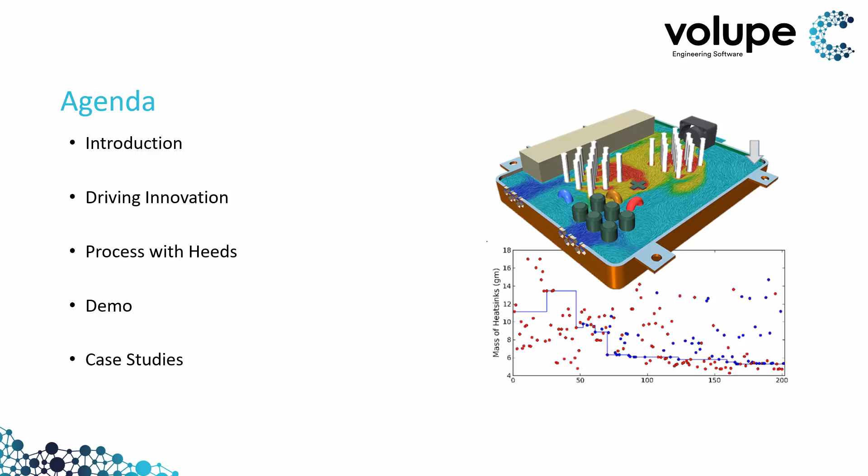Now to start off, the reason we're talking about design space exploration is because we want to drive innovation. 83% of Fortune 500 CEOs list driving greater innovation as one of their top 3 priorities. But although everyone wants greater innovation, many are unsure on how to achieve it. Now today we will specifically be looking at how you can get more value out of your modeling and simulation environment, while at the same time drive your innovation.

The example on this slide perfectly describes the complexity of many of our products today and the challenges that engineers are therefore faced with. This example of a cooling simulation from an electronic box shows a multitude of variables which an engineer can play with in order to achieve the most optimal design. There's the type and location of the fan, the size and location of the air holes, the material, location and dimensions of the heatsink, etc., etc.

Now, of course, an engineer can run a simulation, interpret the results and based on that change 1 or 2 variables in hopes of achieving a better performing model. However, due to the amount of variables and how they each affect each other, it is almost impossible to explore all the design options and find the best possible solution.

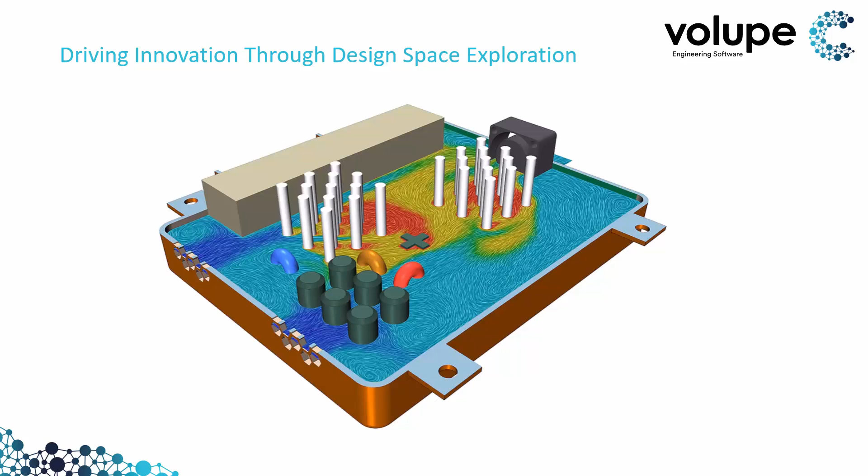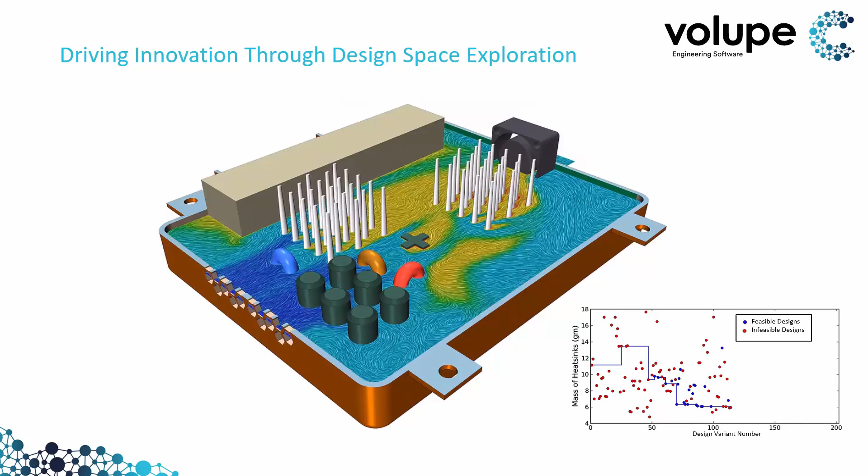This is where design space exploration comes in, and where the software automatically alters the variables, runs the simulation, interprets the results, checking whether it's a feasible or infeasible design, and continuously improves the design further until the best feasible design is found given the set objectives, which in this case is a minimum temperature and mass.

Now this is a process which can run in the background, overnight or over the weekend, while the engineers focus on other tasks, resulting in this specific example in both a reduction in mass as well as a significant cooling improvement. Of course, this is a specific CFD example, but the same can be done for the type of simulations that you are currently running, whether that is structural or acoustic or even logistical.

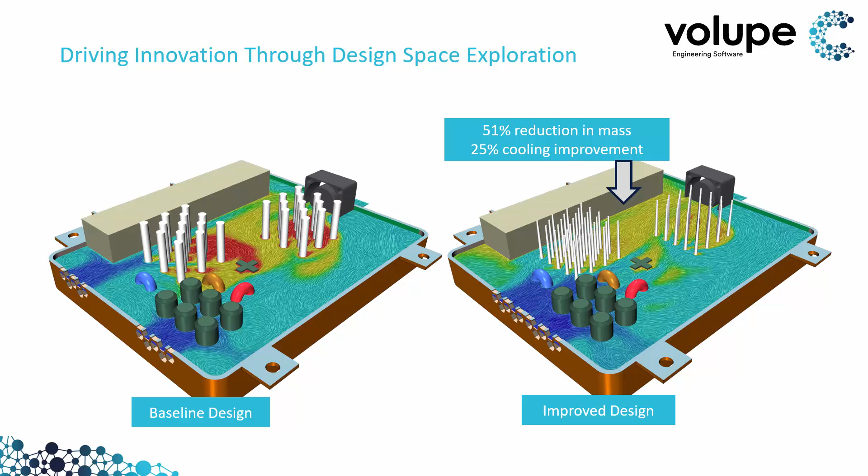The goal of utilizing design space exploration is to move beyond the standard use of simulation for validation or troubleshooting. Of course, with simulation-driven design, as we presented in a previous webinar, we are already moving into the proactive domain, as we are already trying to use simulation as early as possible in order to have a maximum impact on the costs, quality and time to market.

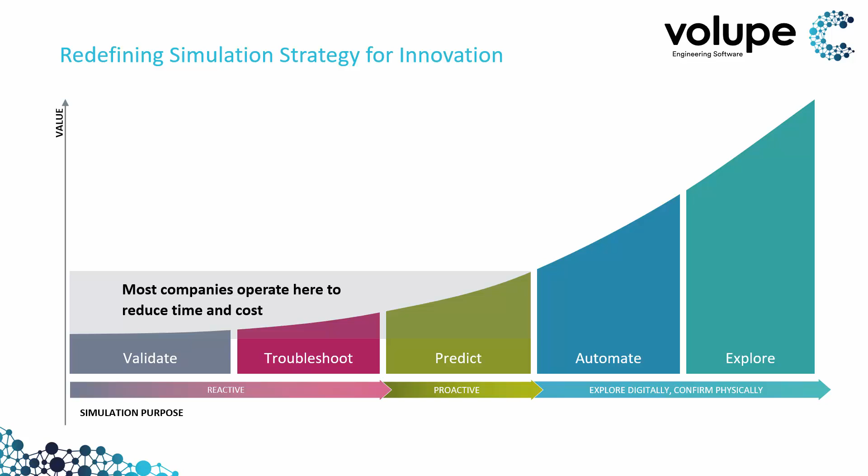And this is also where most companies nowadays are operating. But the real value lies in automating the simulation process so that the engineer has more time free for other activities, and then to explore broader design spaces to discover much better designs in a much shorter amount of time.

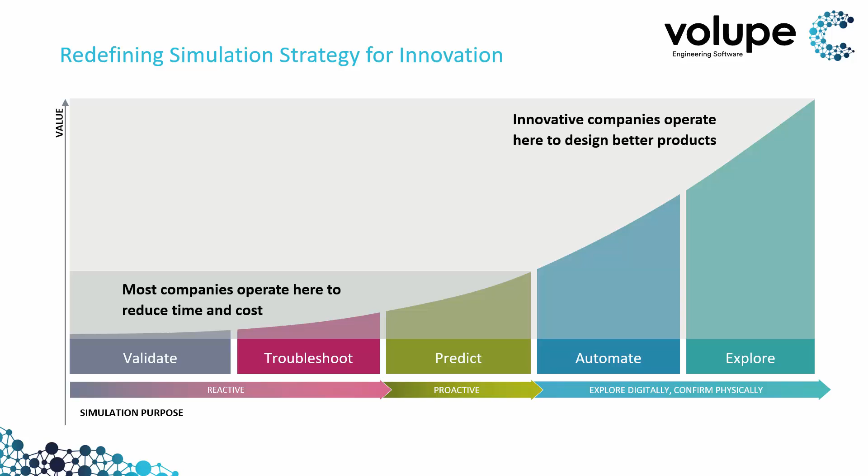Thank you, Vasco. So let's discover better designs faster with HEEDS. Here on this slide I have a typical setup for prototype development. You have design variables that you can change. You do some testing and simulations and virtual testing, and you get a response out of it, which is something that you care about.

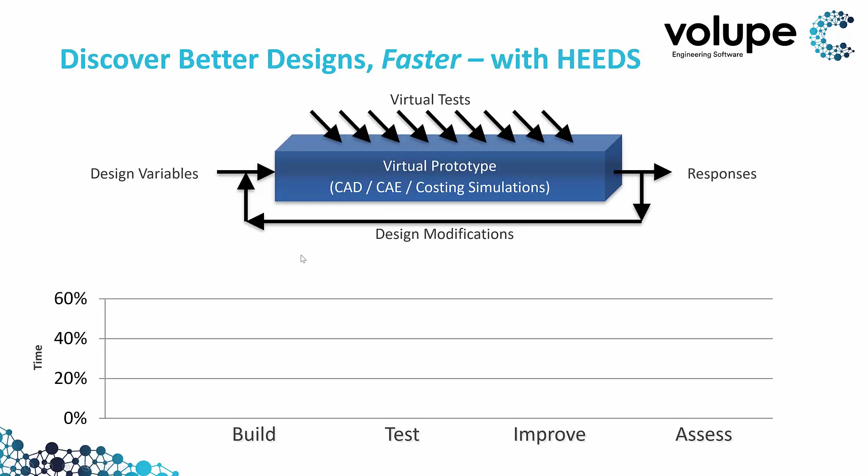Ideally now you would actually be satisfied right away, but this is not often the case, so you have to do some modifications, go back to your design variables, do the testing again, and look if your modifications now meet all the requirements. So when we ask people how they actually spend their time on this process, they say often that they use a lot of resources to build the model, test it, and then when it comes to improvements like design modifications and the assessment, often the project runs out of time.

But we can all agree on that the actual value that you can extract lies exactly in the improvement of the design and not in building the setup. So this is what HEEDS actually wants to do. It wants to align the values better with the time spent and the resources required. And therefore HEEDS comes with three main pillars.

The first is process automation that allows HEEDS to run most of the CAE tools right out of the box. You can just drag and drop them into the interface and execute those models and connect them together.

The second one is distributed execution. You can use your computer resources in the best possible way and use cloud-based or on-site or off-site resources. And then the core is HEEDS's efficient search algorithm, the best on the market actually, that allows you to be confident in finding improvements with any given number of variables for your system.

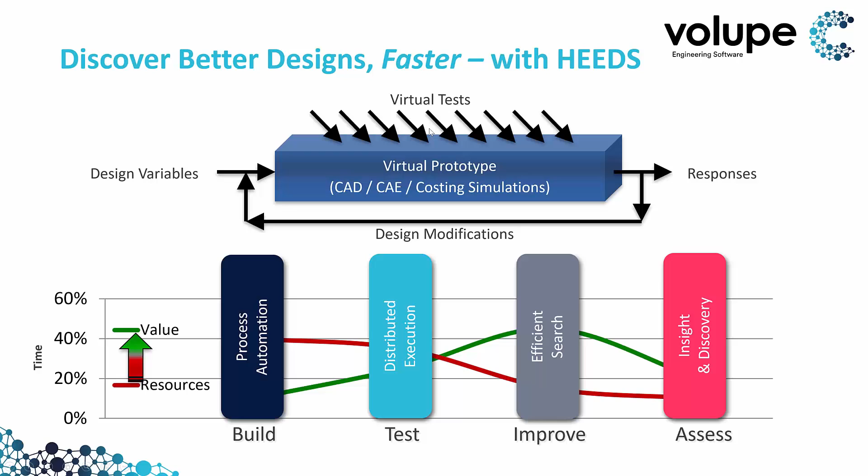And the last one is that you actually can make discoveries and extract meaningful data and make intelligent decisions based on that. So in today's webinar, I would like to show you a study based on these 4 key enablers for underhood pipe flow design.

So this is the engine, and here we have a pipe connection between these two hoses here. Inlet is on this side, the flow goes in and it goes out here into the rest of the engine. The pipe has some parameters.

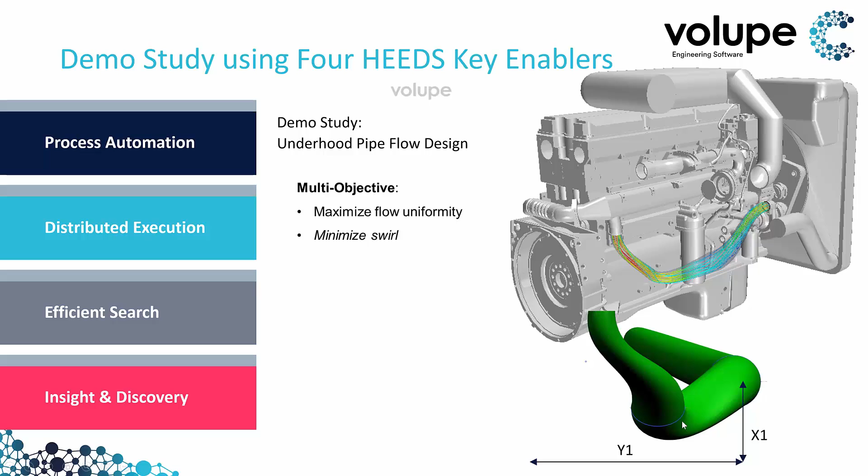It's built up from inlet, outlet, and in between we have 2 cross sections, circular cross sections, where you can vary the diameter and then the position of the 2 cross sections. So you can change it like this and up and down as well. And if we look from the side, for the second circular cross section, it lies about here. We can also tilt the cross section with an angle.

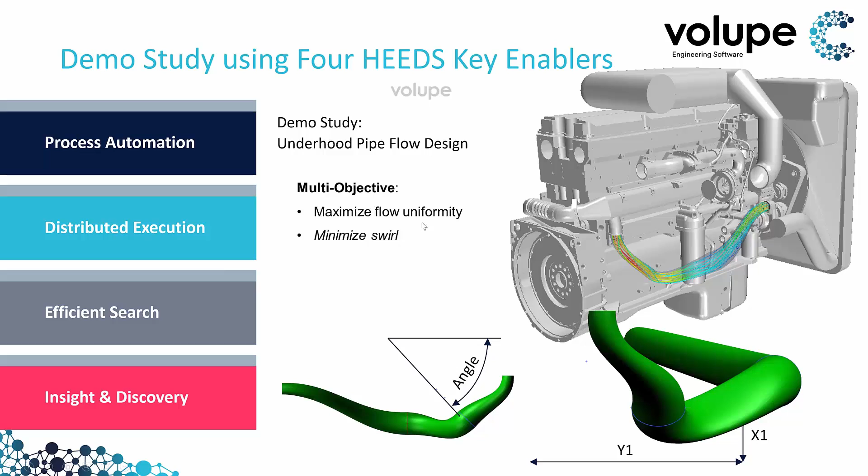So the idea is to actually maximize the flow uniformity here at the outlet, while at the same time minimizing the swirl. To do that, we use 2 tools to simulate and understand how the virtual prototype actually performs. One is NX for the CAD geometry generation, and one is STAR-CCM+ for the simulation.

So in NX, we prepare the design with parameters to describe it, and then HEEDS comes in and overrides these parameter values with design variables which were created or controlled by the algorithm.

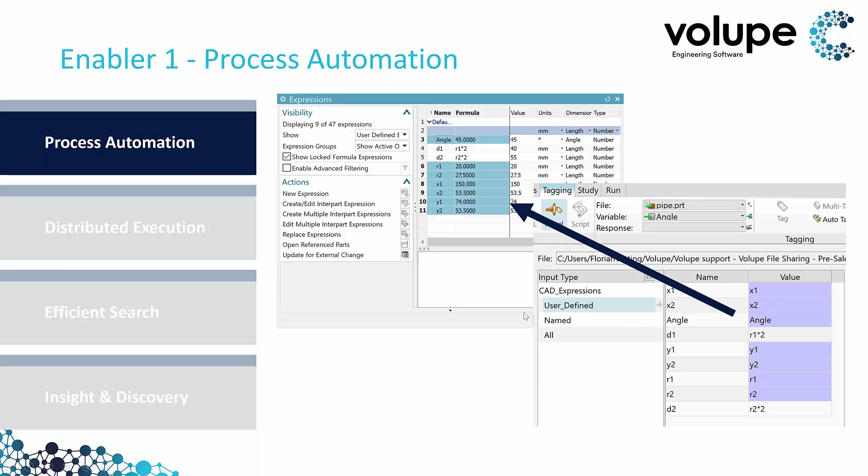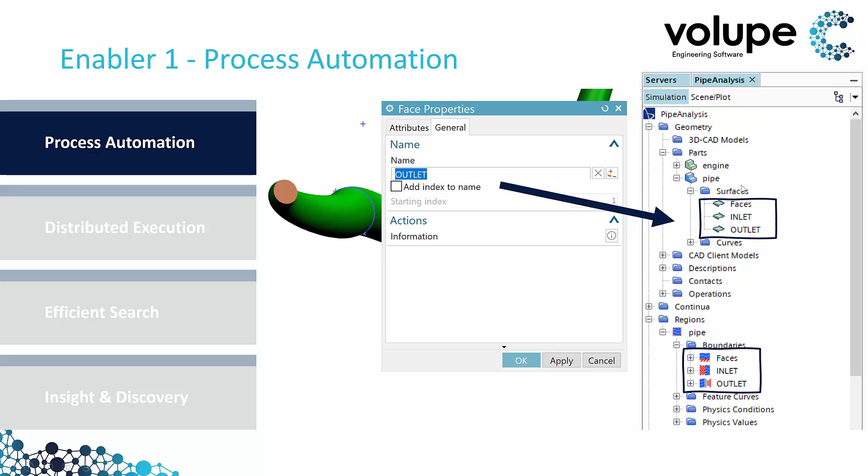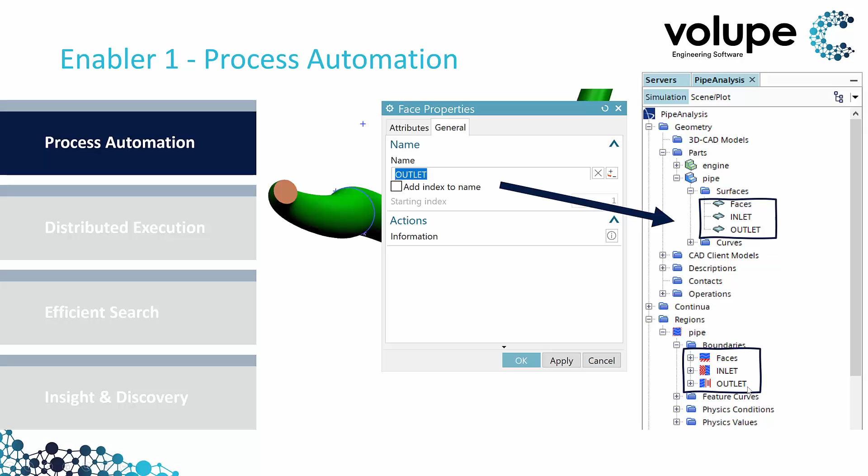On the other hand, on the other side of NX, we actually take the new generated geometry and put this new geometry into our star analysis simulation and exchange our pipe part inside star with the new surfaces, and then they get updated and meshed, and we have new boundaries. So HEEDS controls this in an automated way and iterates to improve the design.

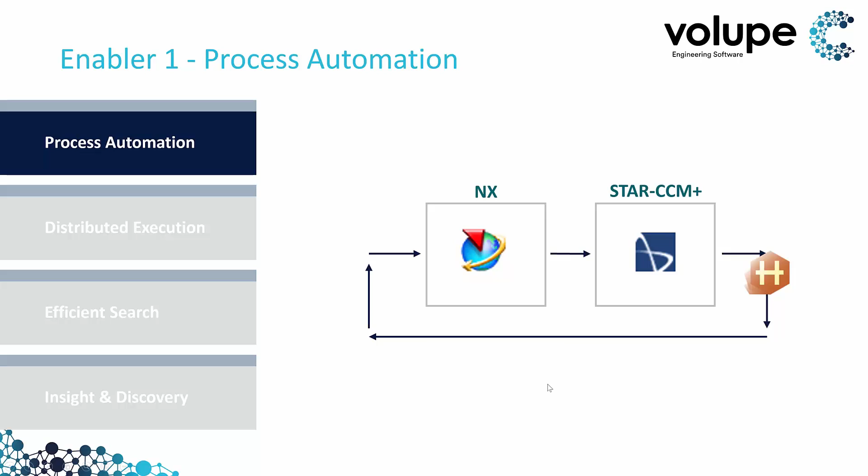Here we can see how we can build it up. We just drag and drop the portals into the place, and we can also use the default portal and just assign it to a certain program. Like in this case, we might want to have a third program, maybe SimCenter 3D for strength calculations, and then we can move them around in the design.

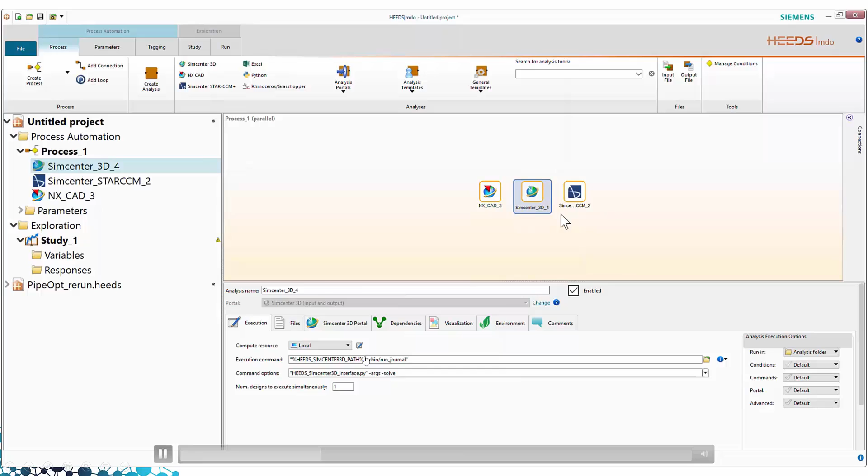The processes can be moved around in your work on your desktop here, and decide if you want to run it in parallel or if they are dependent on each other. So you can drag and drop any other portal here as well.

So for this case, we just have NX and star, and then we need to define the parts. So we need to have a basic setup with the part here as an input to our analysis and an output. We use a parasolid here, and the same for star. We have as input our baseline design, and then we need as input as well our new pipe part that comes from NX, and then we have output as well, and here we tell HEEDS actually to exchange the pipe part in star with the output that comes from NX.

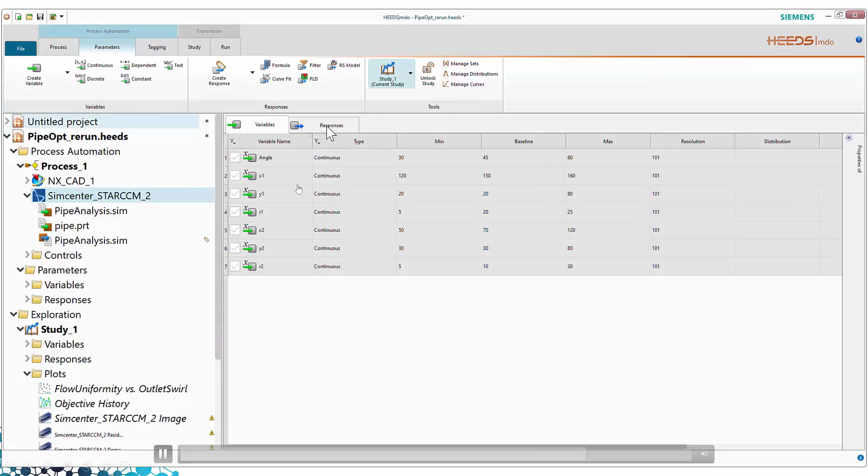Then we create design variables, we create responses, then we go to tagging and actually connect our input files and output files with the design variables and responses that we want to have, like in this case the flow uniformity from a report in Simcenter STAR-CCM+.

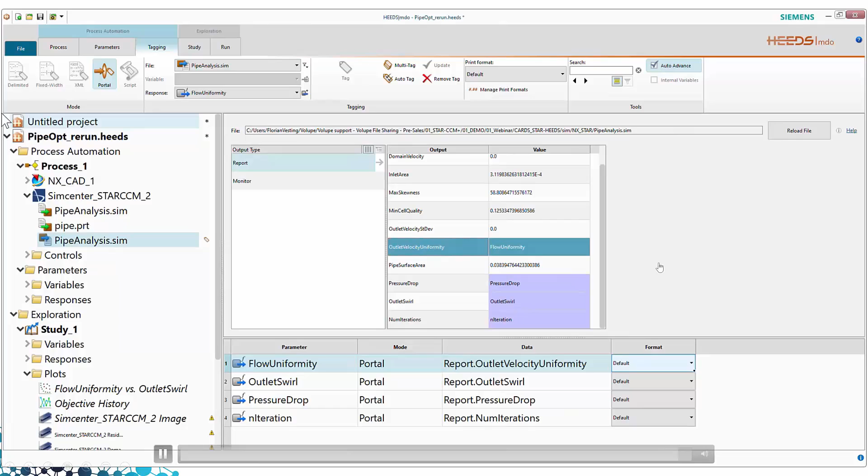So you actually don't need to have any manual data transfer and no custom scripting. It just automatically shares data between the different modeling and simulation products, and ensures that in this manner it robustly remeshes and updates the simulations, so that you can spend your time more efficiently on the post-processing and save some time in the actual setup here.

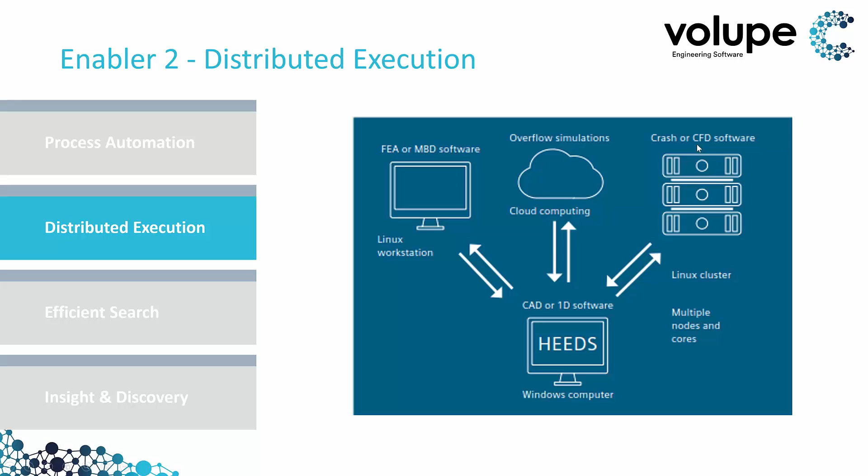So the next enabler is distributed execution. In this case, I actually use HEEDS on my local machine together with NX on the local machine, but I tell HEEDS that I want to run the actual CFD analysis on a Linux workstation, which is located remotely. But you can use, as I mentioned before, cloud computing or any other cluster resources that you have at hand.

And you do that by, for your process, selecting from the drop-down menu which computer resources you want to use, one execution of NX, and on the cluster head node, I run 2 simulations of the CFD analysis in parallel. And we have kind of a powerful cluster, so I go to the star portal and also select that I want to use the power session and 40 cores per job at the same time.

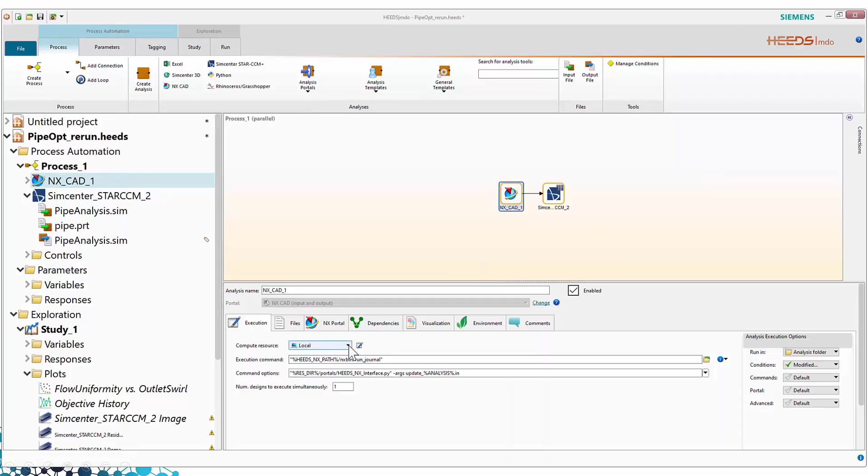So this actually enables you to leverage all the available computer resources in the best manner and reduce the simulation turnaround time significantly, so that you can maximize your investment.

Next is the efficient search. We have direct search technology here enabled in the HEEDS SHERPA algorithm. It works without the need of surrogate models or anything else. You don't need to screen your variables for the importance, because Sherpa does that on the fly, actually updates and adapts and combines the best search strategies.

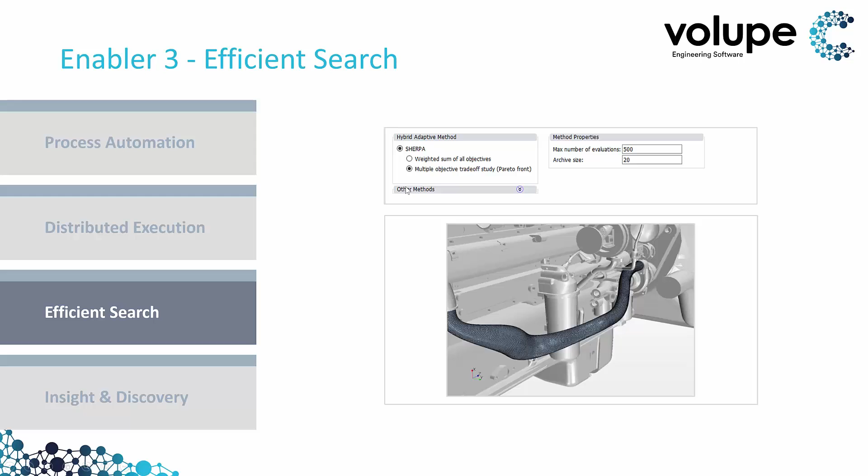So how does it look? You go into the study tab, and then you can select what study type you want to do. You can do more than just optimization. You can do a robustness and reliability analysis or design of experiment. But we will stick with an optimization, and we want to have a multiple objective optimization.

So we need to go to our responses and specify the objectives that we want to have. The flow uniformity should be maximized, and the outlet swirl should be minimized.

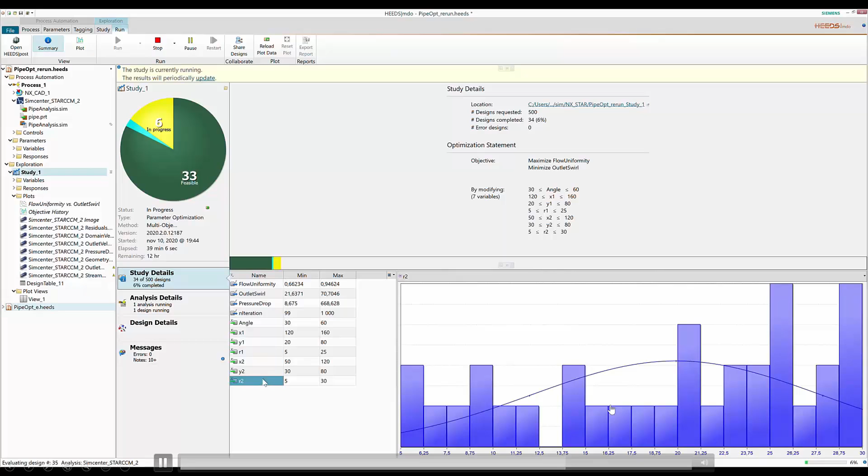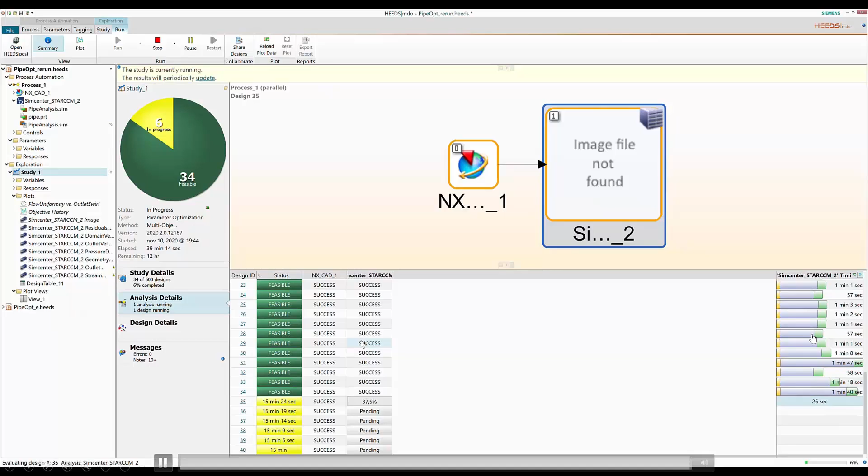So this is very, very powerful, and you don't actually need to be an optimization expert to set this up. You just specify how many variants you want to run based on the budget that you have on time and resources.

HEEDS SHERPA algorithm adapts the search on the fly and speeds up the overall optimization time.

But you can also tell HEEDS to learn from previous simulations, such that when you restart your optimization from a design of experiment, it already has some knowledge and can make use of that.

Last but not least, and most importantly, is enabler number 4: getting insight and discovering the designs. You can build up your dashboard with multiple screens and plots, and visualize design and trends more comprehensively.

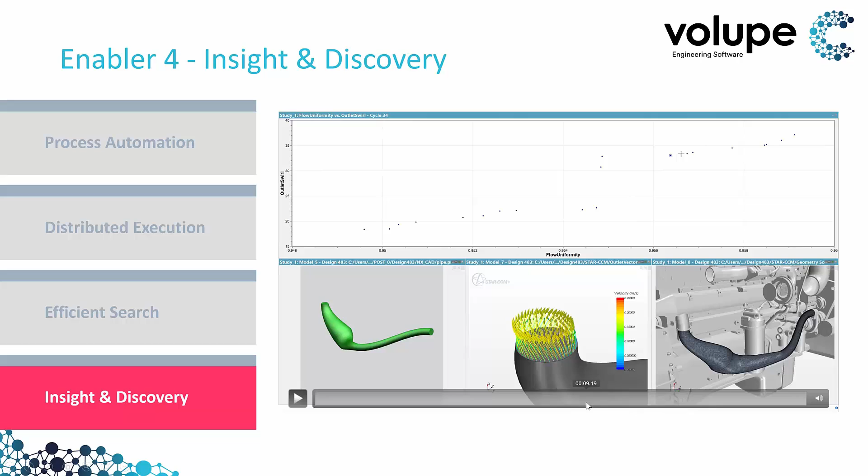This jump is an indication of 2 separate families of designs, which can be very interesting to help decide which design family works best, depending on manufacturing, packaging, or something like that.

When you're in HEEDS post, you can do more than that. You can, for instance, look at the parallel plot. If you're not familiar with it, on the vertical axis we plot performance and parameters, and for each variant created, we connect the lines across these vertical axes.

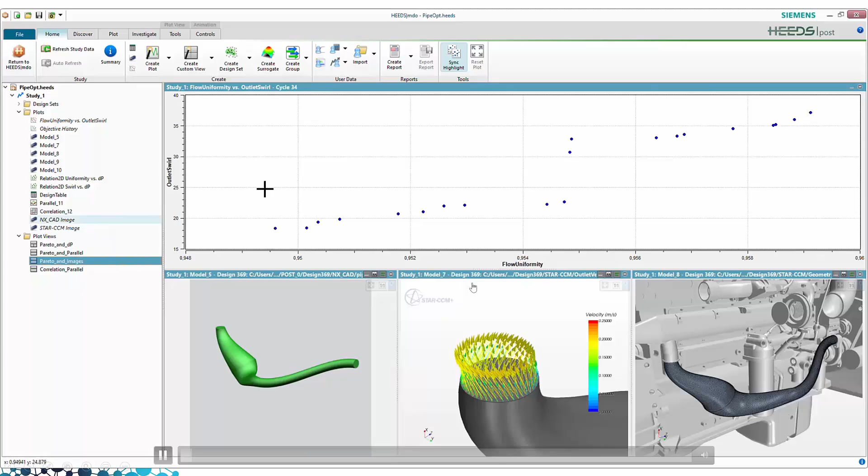What I intended to show here is how you can make better visualizations of these 2 families. I created a subset of both the lower and upper designs, and then loaded these designs into my parallel plot.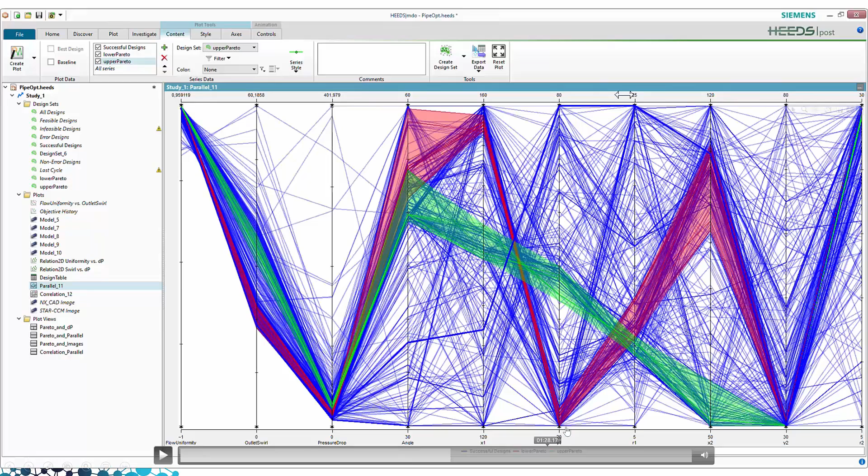Then I can highlight where these designs are located, so you can instantly see that this family follows certain design variables, while the lower family follows another variable, like for Y1.

But you can also go through all the figures and make some animations directly from the HEEDS user interface.

But you can do more, like importance analysis, as shown in this plot. Here we have flow uniformity and outlet swirl, and the importance analysis tells me that for the uniformity, I have 2 to 3 important design variables.

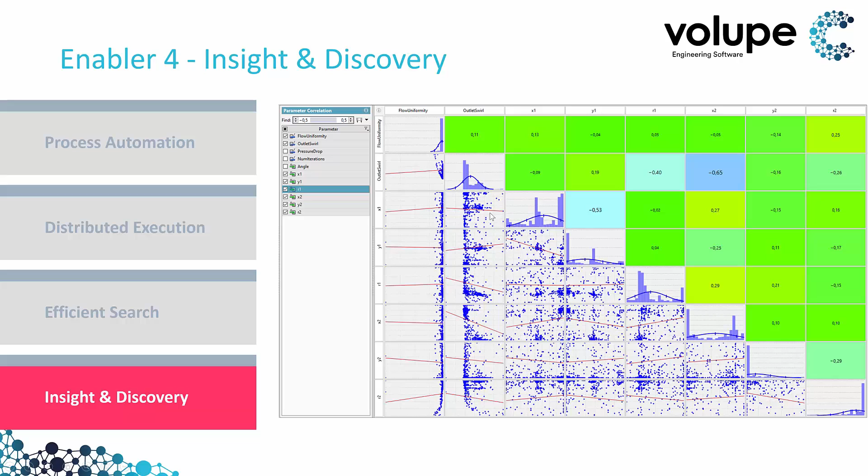Most importantly is diameter 2. But when it comes to outlet swirl, actually all of my variables are important and have influence on it. You can also do a correlation analysis to see which parameters influence which objectives.

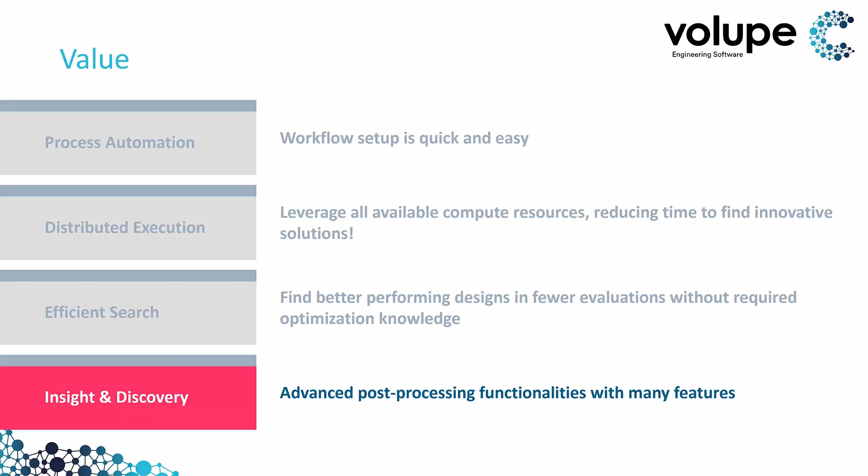This enables you to get knowledge about design performance and deep insight into your product design alternatives. HEEDS makes it very easy to extract meaningful data and make intelligent decisions based on that.

Here we have an example of Trek, a bicycle designer who used design exploration to come up with a new frame design. The goal was to minimize aerodynamic drag and frame mass at the same time.

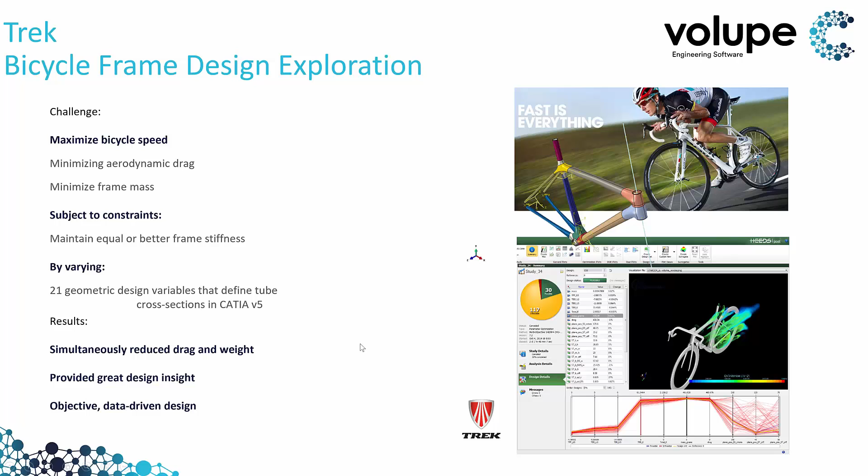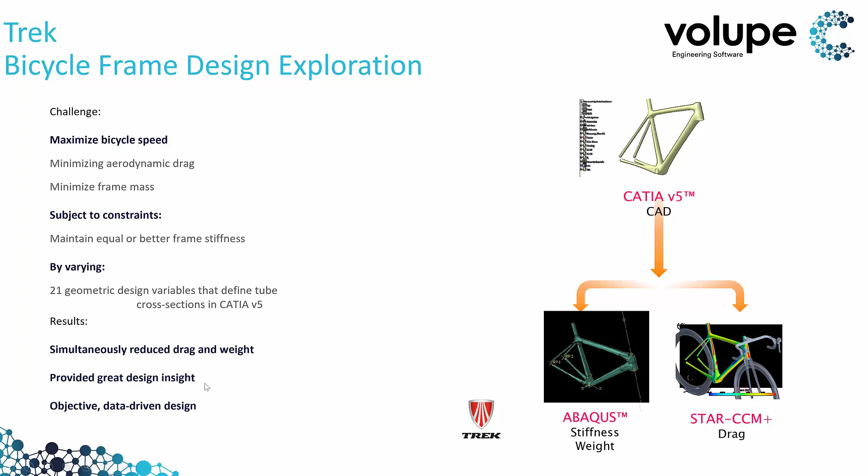They used CATIA Abaqus for the strength, stiffness, and weight calculation, and Star-CCM+ for the drag calculation, performing an optimization that simultaneously reduced drag and weight while providing greater design insight.

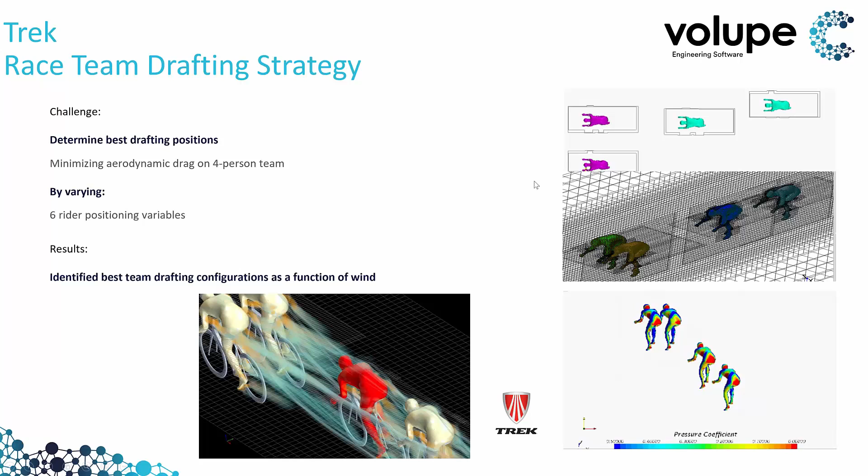Here's another example from the same bike manufacturer: optimizing the position of the biker team to reduce aerodynamic drag. They moved the position of the bikers in Star CCM+ and calculated the drag to find the best possible configuration.

One more example: why not improve the recipe? In this case, the idea was to reduce costs while providing a certain amount of nutrition, moisture, proteins, and so on.

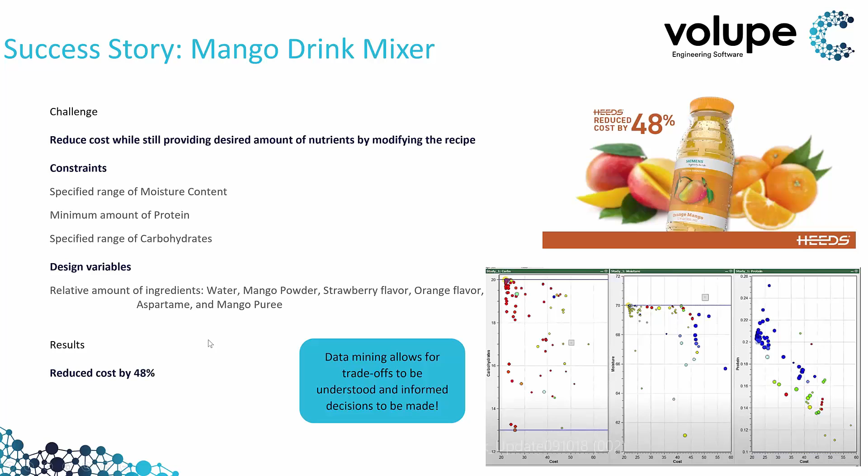Using HEEDS, they gained more understanding of how these design variables, like the ingredients, work together, and they could reduce the costs by almost half.

So thank you very much. I hope you find this very interesting.